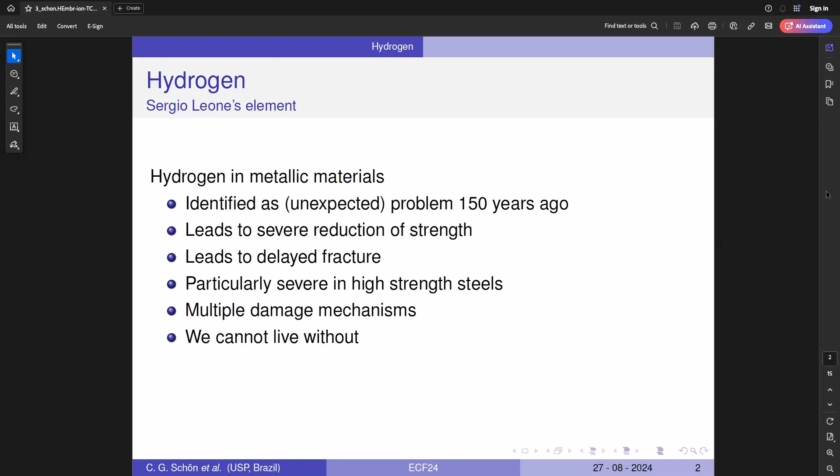First of all, I would remind you of one particular nice set of Westerns that we have in the movies called spaghetti Westerns. Maybe you know, in particular, director Sergio Leone produced lots of films on this, and there was a particularity in his films. There were no good guys. So everybody were bandits.

So, I decided to call hydrogen the Sergio Leone element because it seems that every place that you put hydrogen, it brings something bad for us. But just to remind what we know about hydrogen and materials. First of all, it's not a new problem, it's already identified some 150 years. Of course, we know it brings a decrease in strength, so it leads to delayed fracture, which is even worse in service because you produce a component and suddenly it breaks, so it's not very funny to have this kind of problem.

It's particularly severe in high-strength steels. So the steels that we use for good purpose are the most susceptible to present hydrogen embrittlement. And of course, when something is that bad, it is unlikely it is bad just for one cause. So there are multiple damage mechanisms in many materials, and there are interactions between the mechanisms.

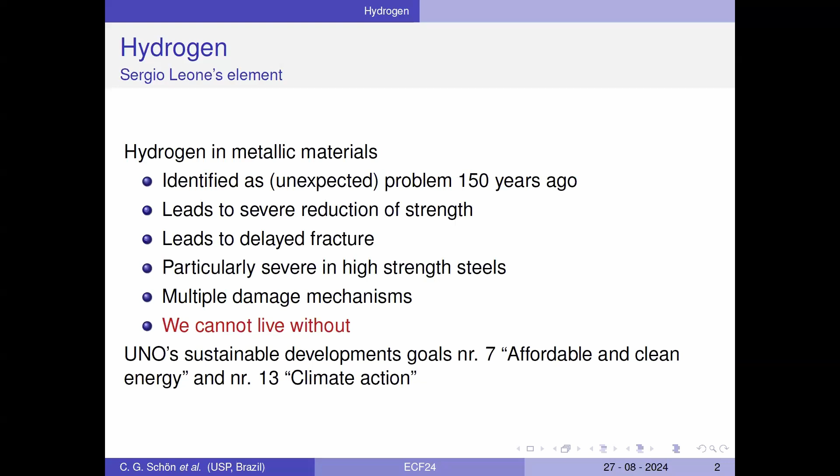And of course, the reason is this here. So we are not only working in one of the critical problems of mankind. We are working in two. So producing energy in a clean way and controlling climate change. So this is what we are doing here.

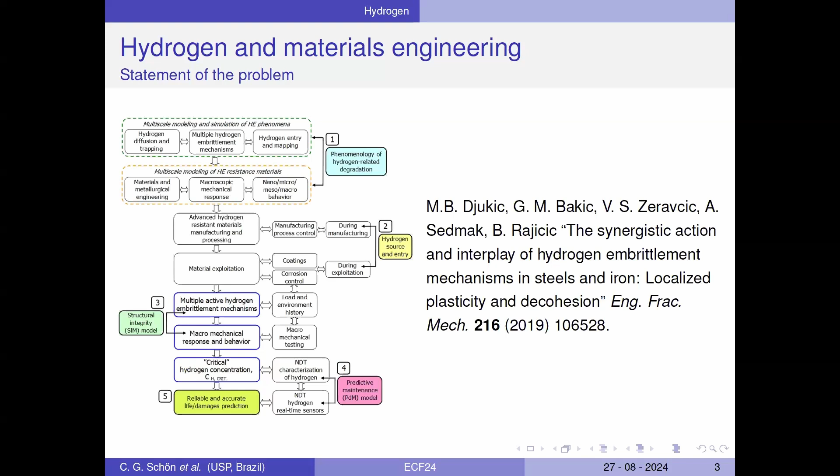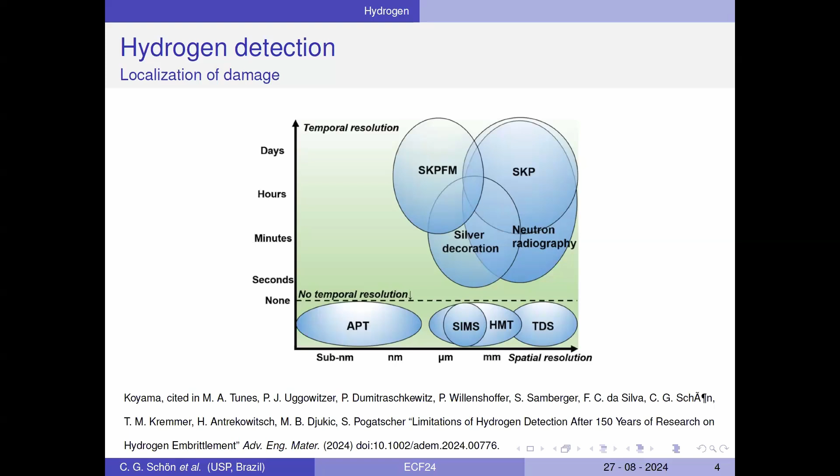Then talking to my colleague in the Federal University of Rio Grande do Sul, which is very far in the south of Brazil, he reminded me of old work he published many years ago. He investigated cracks in silicon due to hydrogen. In that case, he had to implant hydrogen to produce the crack, but he had also to implant helium to produce residual stress to cause the cracking. And he suggested we should do the same in our steel.

We are working with 22MnB5 steel, a press hardening steel, which is used for the safety network in cars. It has, sadly, a martensite microstructure, and sadly because you know how messy martensite is for TEM observation. In particular because it's ferromagnetic too. It's full of dislocations, full of defects, and ferromagnetic. Everything that is hard to look at in TEM.

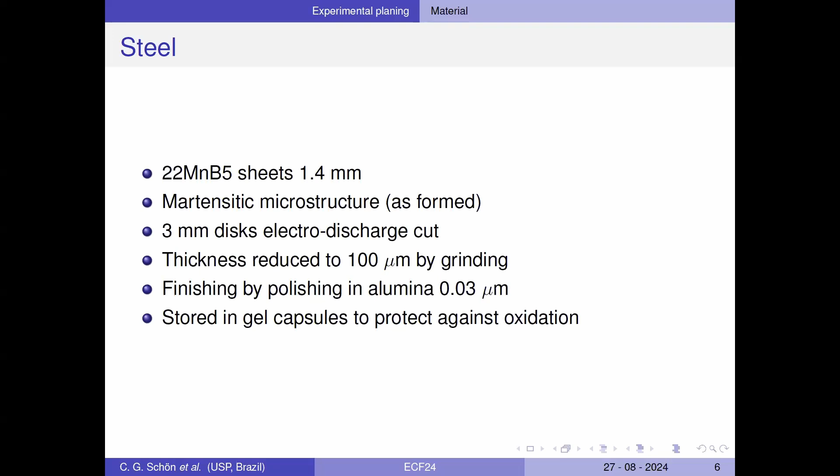We produce 3mm discs for use in the TEM, reducing the thickness to 100 microns, polishing in alumina, and to protect from oxidation, we store them in gel caps. The original idea was to do two kinds of samples. The first one was what we call the face-on sample. We would implant hydrogen and then approach both sides, one with the dimpler, the second one with ion milling, so that we could observe the region affected by hydrogen.

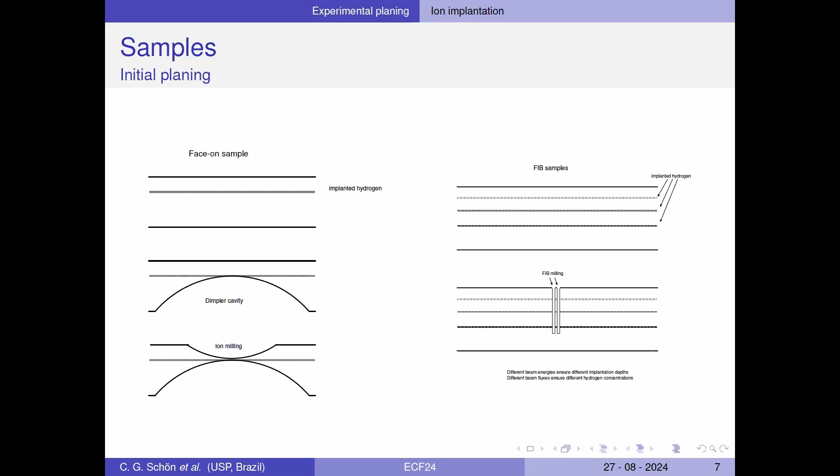The other idea was to implant hydrogen at different depths with different quantities and then produce a FIB sample to look at very different hydrogen levels. This is the first experiment we did, and I must say that we are at the beginning in this area. So we had only the first experiments to report. We did a simulation, and this produces a hydrogen layer some 150 nanometers below the surface. So it's not very nice.

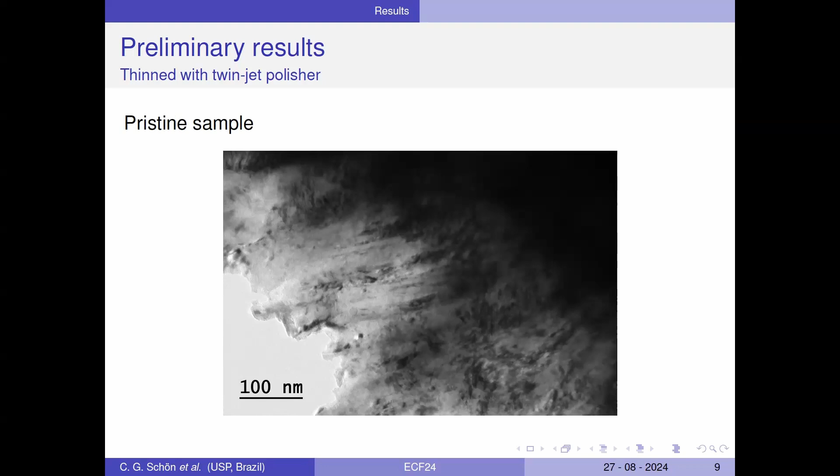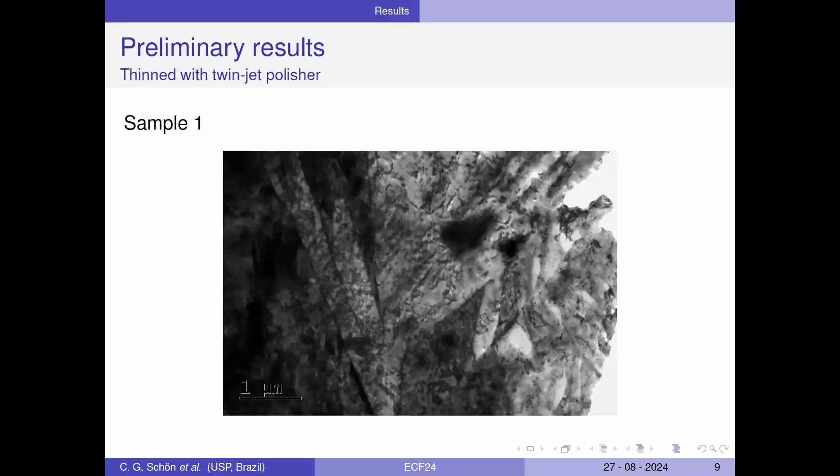Please don't pay too much attention to this because this is quick and dirty. We prepared a sample with a twin jet polisher just to see if we could look at the microstructure. So it's full of artifacts and other things. We are still securing time on the FIB to do the experiment. But anyway, I can see here some changes. This is the usual lath microstructure of the martensite. And I imagine there are some changes here in the region affected by hydrogen.

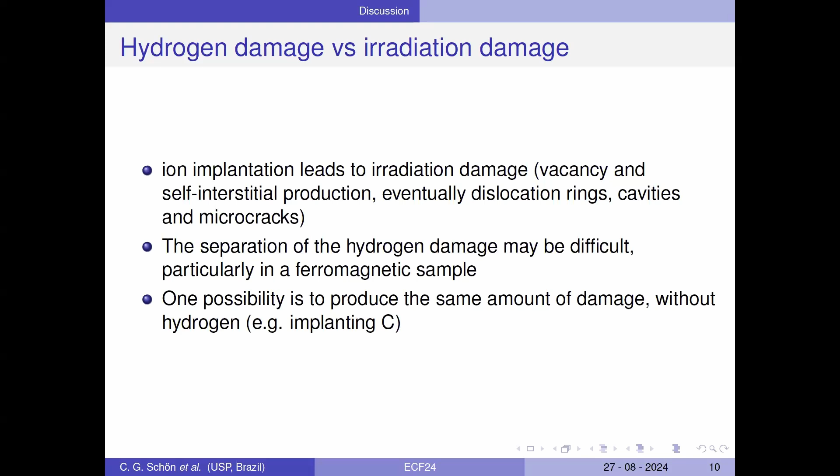One problem that was already identified is that ion implantation produces irradiation damage, and this could produce defects, and we have to separate this. One of the first solutions was to implant something other than hydrogen with the same damage level so that we could identify the irradiation damage. But then I remembered something. Imagine that we have an implanted hydrogen layer. The ions arrive from this side. The damage occurs in the front side of the sample. Hydrogen stops here because it doesn't have enough energy to go further. So the rear side is not damaged, but hydrogen diffuses.

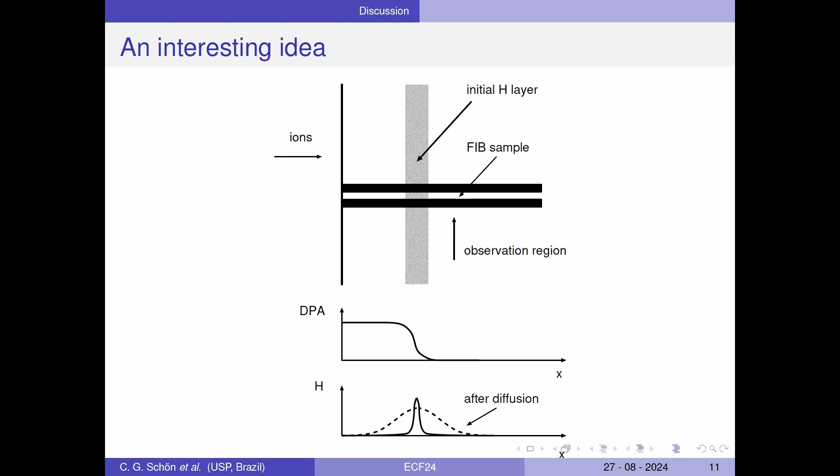So the next plan is to prepare a FIB sample with the implanted hydrogen some months after implantation, so that we can have sufficient diffusion into the other area, and then observe the non-damaged area. So this is what we are trying to do, and we think it's sufficient, so we can introduce a localized hydrogen amount below the surface.

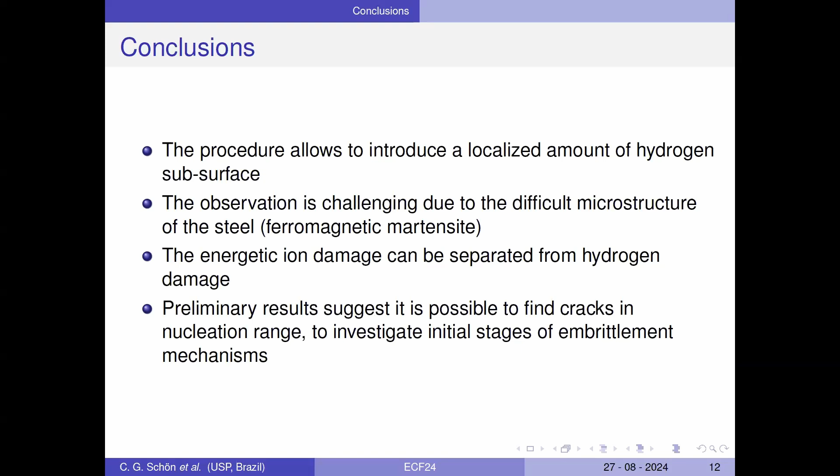There are problems because we are dealing with ferromagnetic martensite. We believe that the ion damage can be separated from the hydrogen damage. And we believe that our results can find cracks in the nucleation range in this martensite. This is what we are trying to do. The important thing is that martensite, with all its problems, has one thing that is very good. It's full of residual stresses. So we believe we will find the cracks.